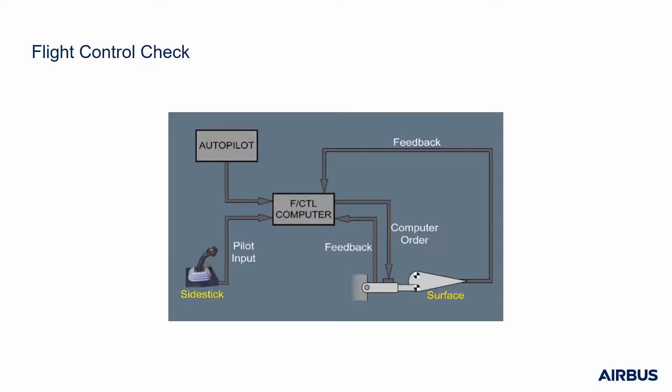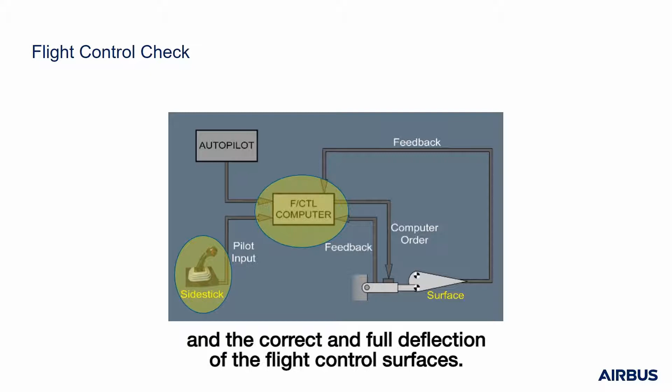It remains a necessity even on the most modern aircraft types that are fly-by-wire equipped. On Airbus types, the objective of this check is to perform an ultimate verification of the entire flight control system before the aircraft goes airborne. Indeed, the flight control check enables the verification of the side sticks connection, the appropriate response of the flight control computers, and the correct and full deflection of the flight control surfaces.

In case of icing conditions, particularly in freezing precipitation, pilots will pay special attention to the flight control check to confirm that the flight control surfaces are not blocked with ice even after de-icing. This recommendation is part of the supplementary procedure for adverse weather in the FCOM.

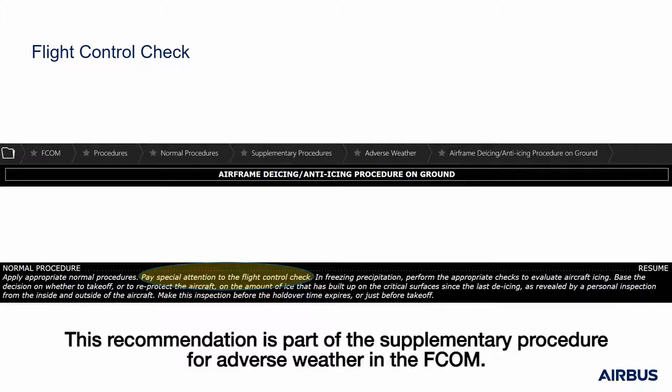The flight control check is normally part of the taxi procedure. However, due to its size, the A380 requires extra vigilance in terms of obstacle clearance. For this reason, Airbus recommends that the flight control check for the A380 is done when the aircraft is stopped, typically after engine start.

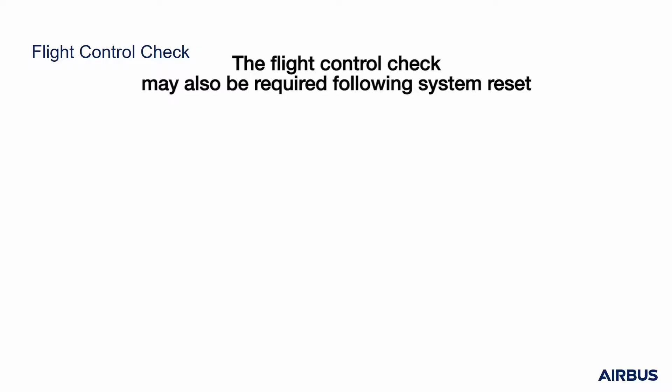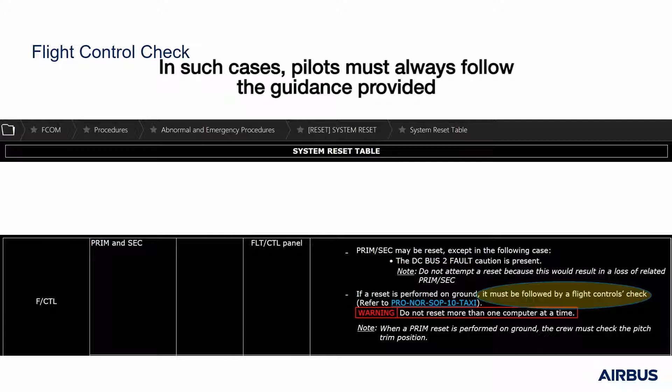The flight control check may also be required following system reset, affecting one or several flight control computers on ground. In such cases, pilots must always follow the guidance provided by the appropriate section of the system reset table published either in the QRH or in the FCOM.

If the flight control check is performed during taxi, the check should preferably be performed when taxiing on a straight line. The flight control check should be avoided when performing maneuvers that require pilots' extra vigilance.

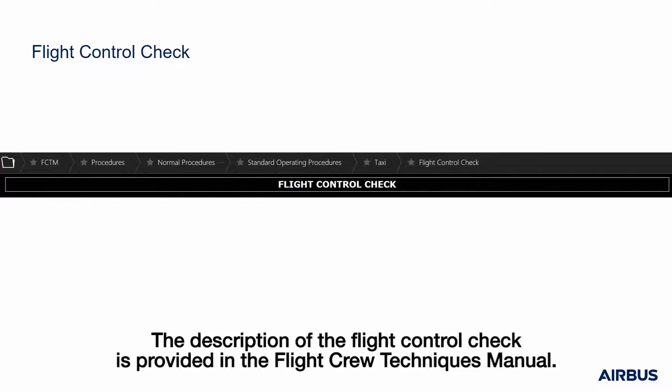During taxi, it is fundamental that the pilot flying keeps his head up and looks outside at all times. Flight control checks should never be done at the detriment of situation awareness and obstacle clearance. In some circumstances, such as low visibility operations, it is preferable to stop the aircraft before performing the flight control check. The description of the flight control check is provided in the Flight Crew Techniques Manual.

This check is common to all Airbus fly-by-wire types. The basic principle is to correlate the action on the side stick or rudder pedals with the flight control system response as perceived on the ECAM system display.

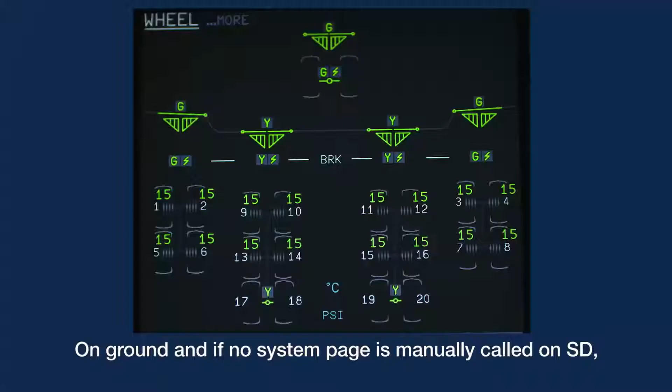On ground, if no system page is manually called on the SD, the flight control page is automatically displayed as soon as any side stick is moved. As a rule, full control input must be held for sufficient time for full travel to be reached and indicated on the flight control page.

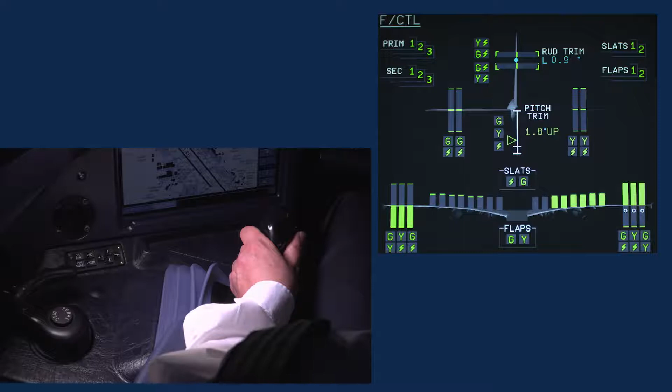At a convenient stage, before or during taxi, and before arming the auto brake, the pilot flying announces flight control check, then silently applies full longitudinal and lateral side stick deflection: full up, full down, neutral, full left, full right, neutral. On the flight control page, the pilot monitoring checks and calls out the full travel of elevators and ailerons, and the correct deflection and retraction of the spoilers using the appropriate callout.

Then, the pilot flying presses the pedal disconnection push button on the steering handwheel before checking the rudder. Indeed, rudder pedals have a limited but real authority on the nose wheel steering. Pressing the steering handwheel push button enables the temporary disconnection of the rudder pedals from the steering system.

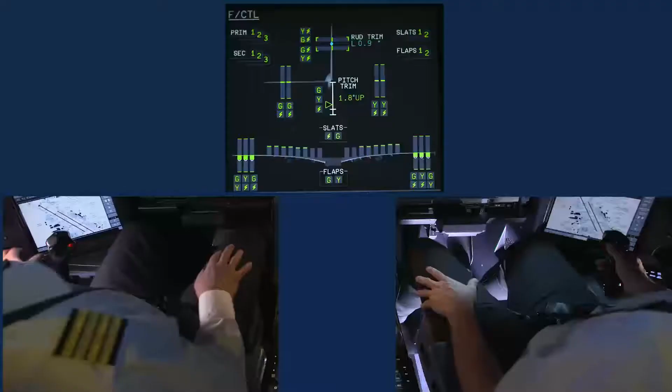Maintaining the pedal disconnection push button pressed, the pilot flying announces rudder, then silently applies full left and full right rudder before returning to the neutral position. The pilot monitoring follows on the rudder pedals and confirms on the SD that each full travel or neutral position is reached using the appropriate callout: rudder, full left, full right.

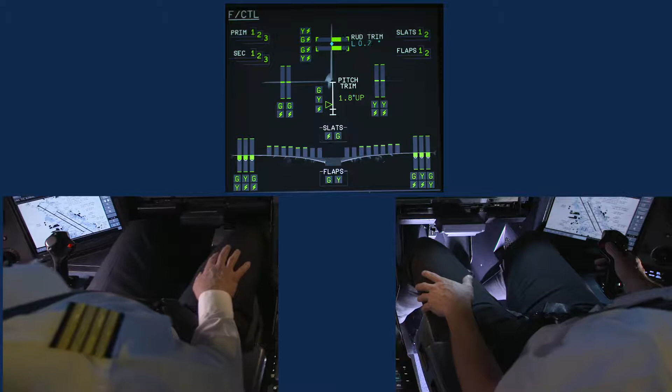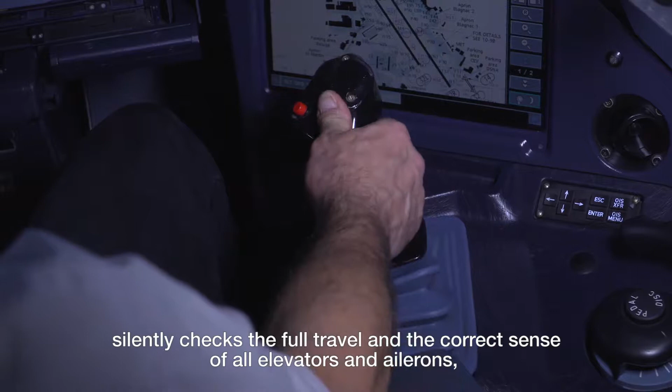Neutral. Finally, the pilot monitoring applies full longitudinal and lateral side stick deflection, and on the flight control page, silently checks the full travel and the correct sense of all elevators and ailerons, in addition to the correct deflection and retraction of all spoilers. There is no need to repeat the rudder check, since the pilot flying and pilot monitoring rudder pedals are mechanically linked.

Airbus has regularly received questions regarding the appropriate order of actions for pilot flying and pilot monitoring checks. Should it be pitch first then roll, right then left? The order is not actually prescribed and is not a fundamental aspect of the check. The most important is that the flight controls check never becomes a routine. Both pilots must remain actively involved, and the flight control system response must be carefully correlated on the ECAM system display.

As an instructor, it is important that during training, you remind your trainees the following three points. The objective of the flight control check is to perform an ultimate verification of the integrity of the entire flight control system before the aircraft is airborne.

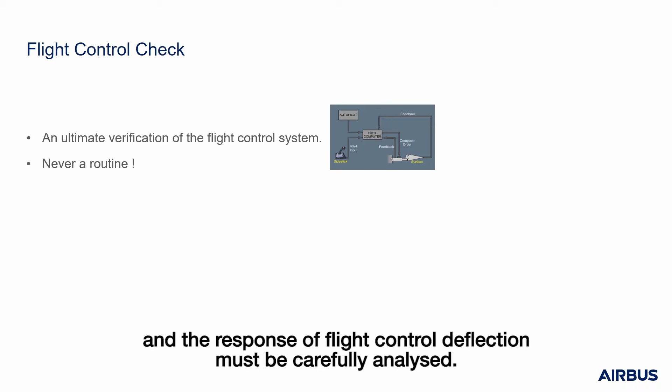Second, the flight control check must never be a routine, and both pilots must be actively engaged, and the response of the flight control deflection must be carefully analyzed. Finally, this flight control check must never be performed at the detriment of the pilot's situation awareness. Obstacle avoidance remains the priority, particularly in low visibility conditions. If necessary, stop the aircraft.